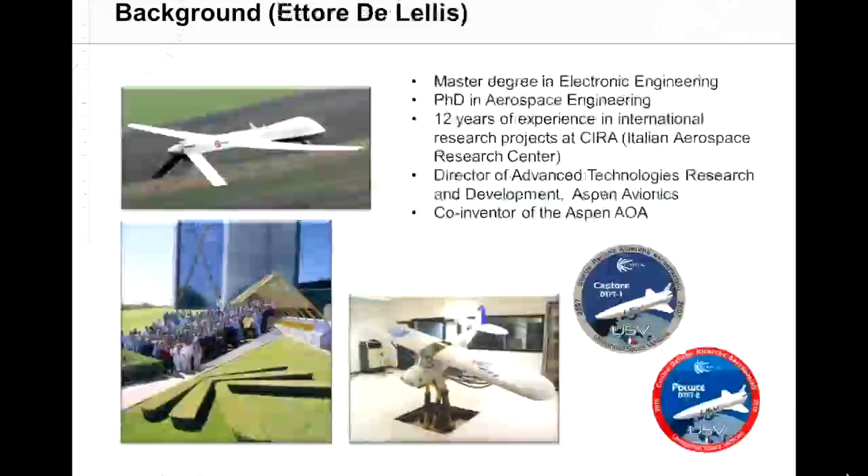I'm very lucky to have with me this evening Ettore De Lellis as a co-presenter. Ettore's background in aerospace engineering is impressive, and we're very lucky to have an engineer of his caliber here at Aspen. As you can see, he has a master's degree in electronic engineering, a PhD in aerospace engineering, over 12 years experience in international research projects at CIRA, the Italian Aerospace Research Center, which is equivalent to our NASA. He's currently Director of Advanced Technologies Research and Development here at Aspen Avionics, and as Jeff mentioned, he's the co-inventor of the Aspen AOA.

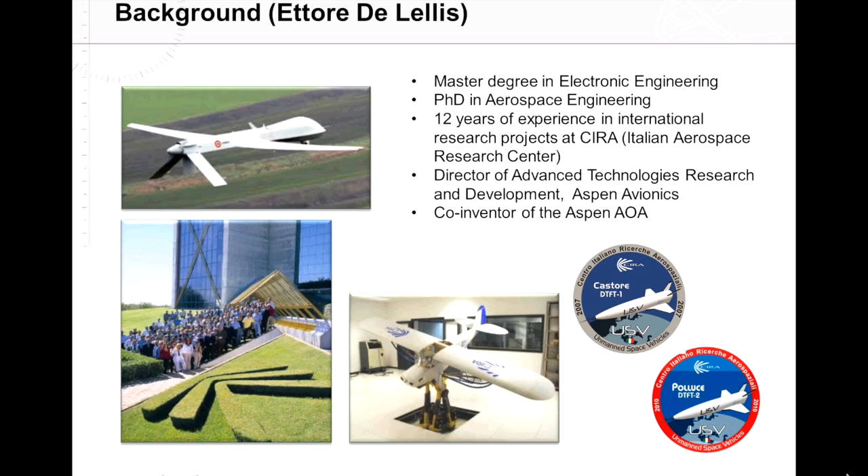So what's the issue? In case you haven't heard, the NTSB has made prevention of loss of control in flight type accidents its top priority. The prevention plan is based on: one, education; two, flight currency; three, pilot self-assessment; and four, increasing situational awareness in the cockpit.

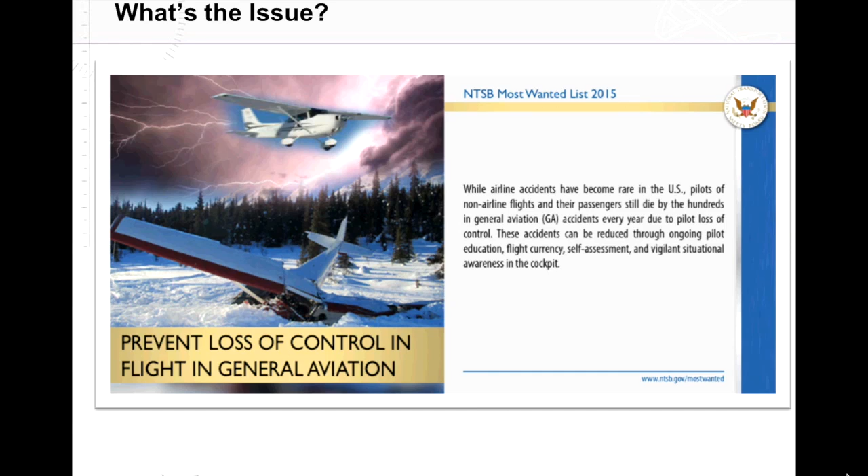Angle of attack indicators, or AOA, have been used in the military and commercial aircraft for years and are a much better indicator of stall awareness than airspeed. Therefore, the NTSB and FAA are promoting AOA indicators for GA pilots in an attempt to reduce these types of accidents.

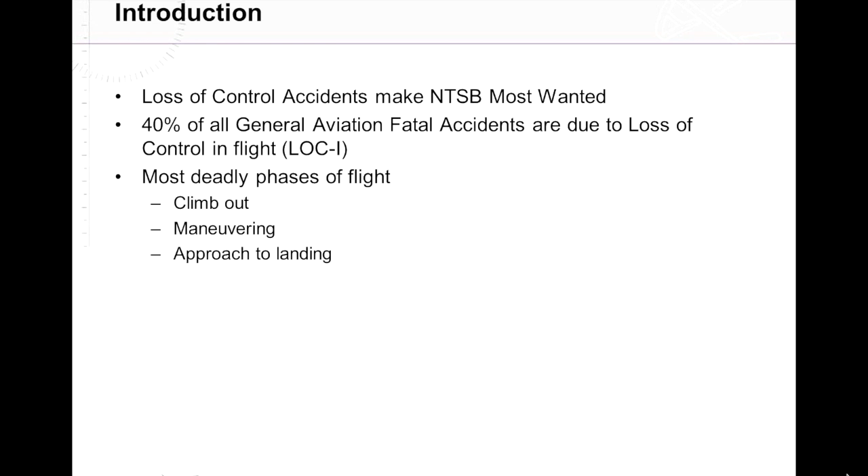The NTSB looked at the most deadly phases of flight, which are climb out, maneuvering, and approach to landing. Well, how many of you do one of these three things when you fly? This is what we do every time we fly.

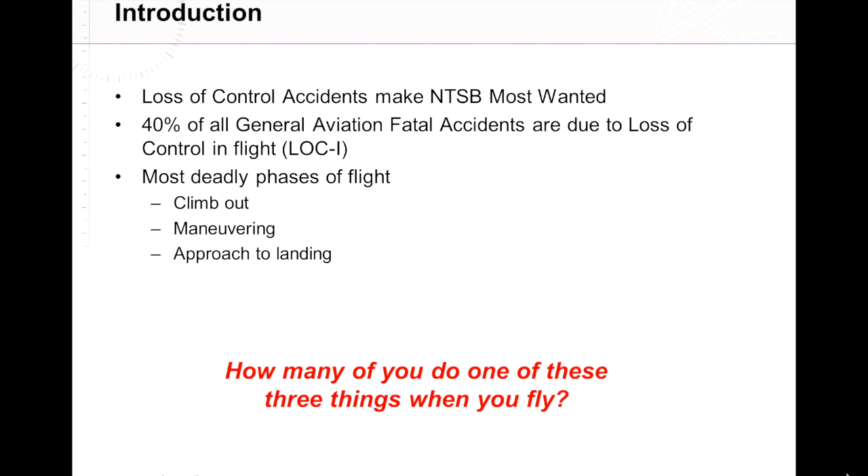Low altitude operations maybe include things such as flat hatting, or a new term I learned this past summer from a hunter, called moose stalls, where hunters are flying low to the ground and they see game they want to shoot later, and they wrap up and end up flying the aircraft into the ground.

Running out of fuel, unintended flight into IMC by a VFR pilot, are other types of accidents that are out there. CFIT - controlled flight into terrain.

If you think back on this one, it was pretty high up there 15 to 20 years ago. This number was reduced through advanced technologies like GPS, terrain avoidance systems, as well as synthetic or enhanced vision.

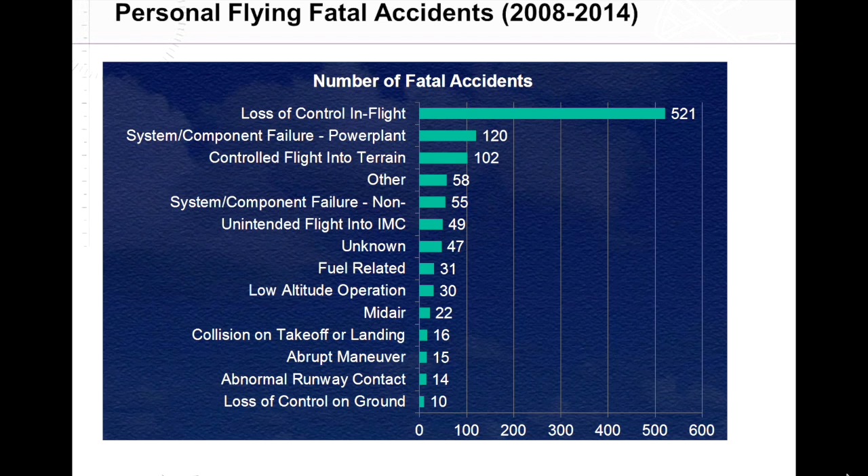Now on to commercial accident stats. But before I show you this chart, I want to go back two slides. Looking at these types of accidents for GA personal flying, what do you think is the top one for commercial flying? Would it be fuel, component failure, CFIT?

When we look at the chart, if you thought loss of control in flight, you'd be correct. So even well-trained professional pilots fall victim to this preventable type of accident.

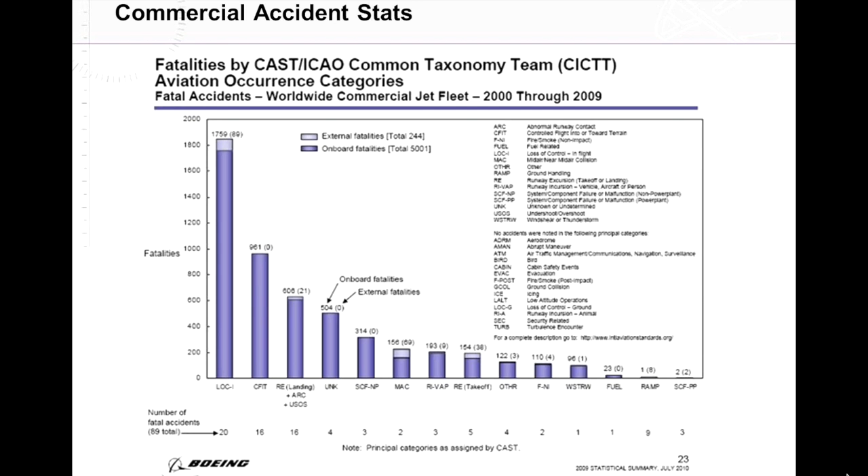Combining takeoff and initial climb, this is where we typically see the power-on type stalls.

We'll skip over crosswind and downwind, and look at base, approach, and finals. These are typically caused by not flying a stabilized approach, correcting only when pitch and power are needed, or overshooting final due to a crosswind. We have a really good video at the end of the presentation to show you how AOA can prevent this type of accident.

Lastly, there is the missed approach IFR or go-around VFR type of maneuver. In these cases, the pilot has made a good decision to discontinue landing, but somewhere in the hustle to change configuration ends up settling back into the ground or stalling the aircraft. This is where an AOA indicator, especially one with dual indicators like the Aspen, really shines.

So there you are coming into land on speed with the AOA indicator parked right where you want it, nice and stabilized. Then just short of the numbers, you notice another plane pulling out on the runway. You immediately initiate a go-around and want to get away from the deck quickly and reach to raise your flaps. You remember from training to look at the flaps-up indicator prior to doing so.

You notice the flaps-up indicator is up in the stall area, so you reduce AOA slightly to get that needle towards the green band prior to raising flaps. Becoming another loss of control in flight statistic has just been averted.

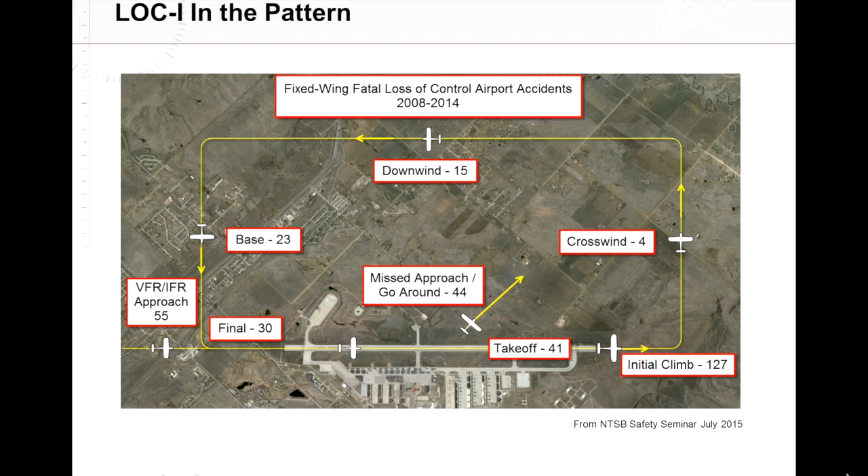So let's talk now about AOA principles. The angle of attack is defined as the difference between the airfoil chord line and the relative wind direction, or flight path in the air. The chord line is an imaginary line drawn from the leading edge to the trailing edge of an airfoil. The relative wind is the direction of the airflow impacting on the wing.

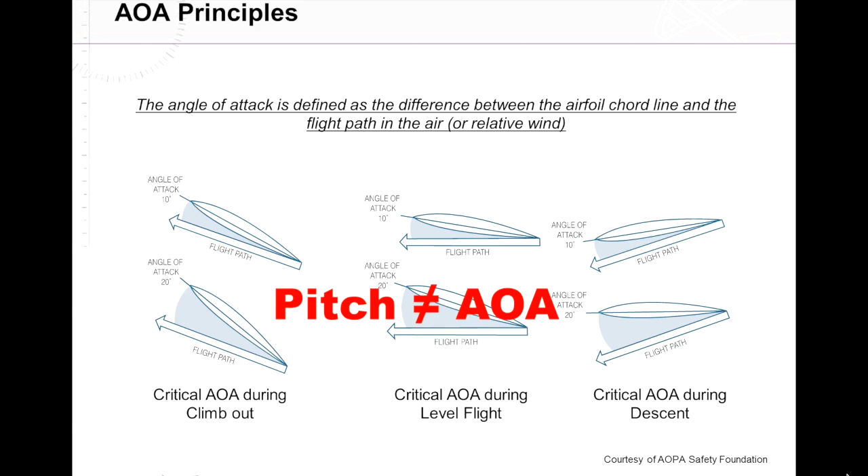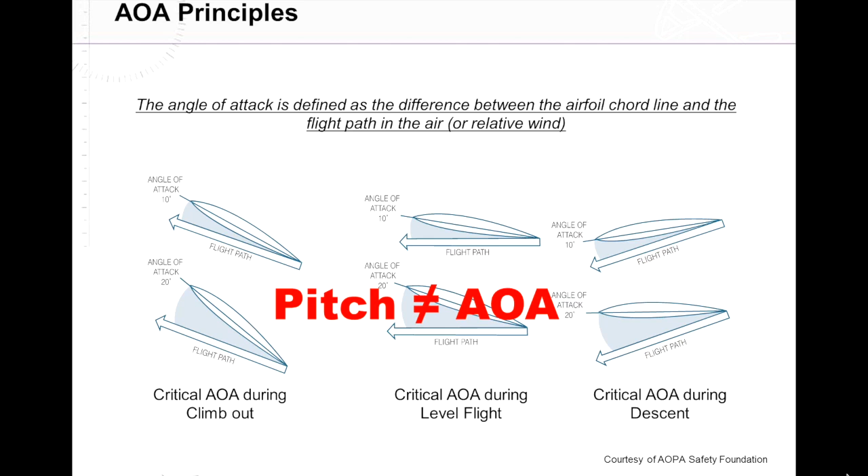In this figure, we want to stress how the AOA is completely different from the flight path angle, obviously, but also from the pitch angle. For instance, we could have the same AOA of 10 degrees in three completely different situations, like climbing out, level flight, or descending.

Stall always occurs at critical AOA. The critical angle of attack is the point at which, as the angle of attack increases, air will no longer flow smoothly over the wing. When this happens, the airflow separates from the surface of the wing, resulting in a drop of the coefficient of lift, and therefore a drop of lift, and finally a stall. Stall always occurs at the same critical AOA, regardless of gross weight, angle of bank, load factor, attitude, CG, and above all, airspeed.

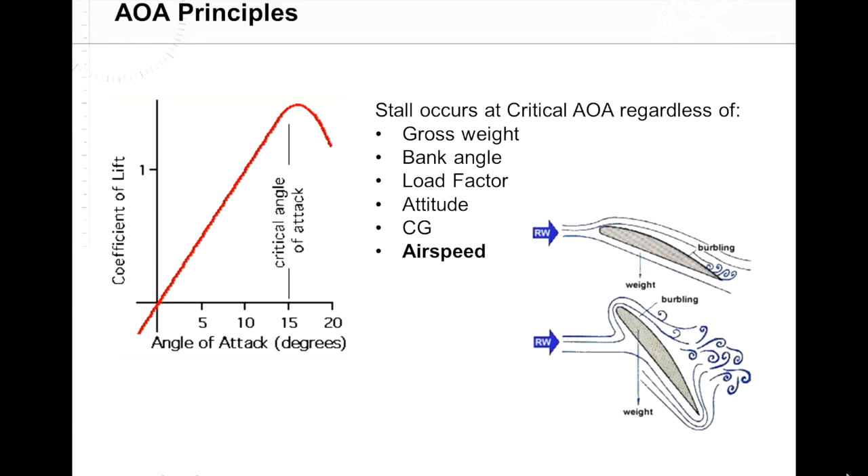Among others, one of the most important variables affecting stall speed is the angle of bank. This is because for angles of bank different than zero, only a percentage of the lift is available for supporting the airplane's weight. The point to be stressed here is that stall speed changes with the angle of bank, while the critical AOA doesn't.

Now, James maybe wants to outline something on this table. Okay, so let me jump in here for a minute.

So what we have here on the right side of the display is a stall speed chart from a Cirrus SR-22. When you fly a normal base-to-final turn in the SR-22, you transition from 90 knots indicated to 80 knots indicated in the turn with the flaps already at 100%. If you look at the most AFT CG 100% flaps down section in the lower right, you'll notice that if you're at 80 knots, as long as you're below 30 degrees angle of bank, you have plenty of stall margin. But when you increase to 45 degrees angle of bank in an effort to save an overshoot, your stall margin quickly gets eaten up.

And if you go even further past 45 towards 60 degrees, basically, if you're at 80 knots, you're going to stall the aircraft. AOA systems such as the Aspen will provide you advanced warning of an impending stall once you learn to incorporate it as part of your normal scan, IFR or VFR, and understand its meaning.

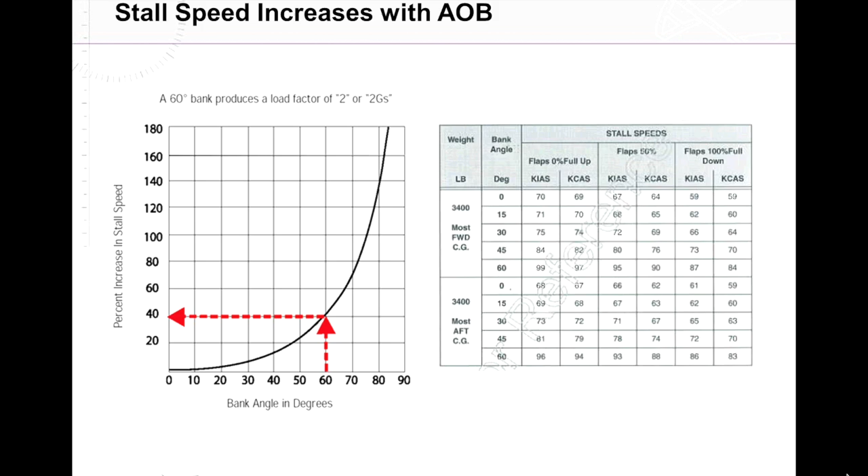So, which are the AOA device styles? There are three main styles of angle of attack devices.

The first is the vane style, mainly used in military and commercial aircraft. The vane rotates to align with the relative wind, and the position of the vane itself is a direct measure of the AOA.

Another style is the differential pressure one. In this case, the AOA is calculated from two pressures measured by a dedicated probe. Finally, there is the software-derived style, where the AOA is calculated using measures typically already available in a display, not from dedicated sensors to be installed. The Aspen AOA is a software-derived device, and we are honored to have received the Flying Magazine Editor's Choice Award for this product.

Well, let me jump in here real quick again, Ettore. I spent most of last spring and summer flying with FAA test pilots and a lot of press and customer demos in my Cirrus. I noticed that when walking up to the plane, everyone was looking underneath the wings and then back at me. I had to chuckle and tell them there are no hidden AOA probes under the wing. Their common question was, how can you do this with just software? My response: it's rocket science. And since we developed this with Chiron, this is a true statement.

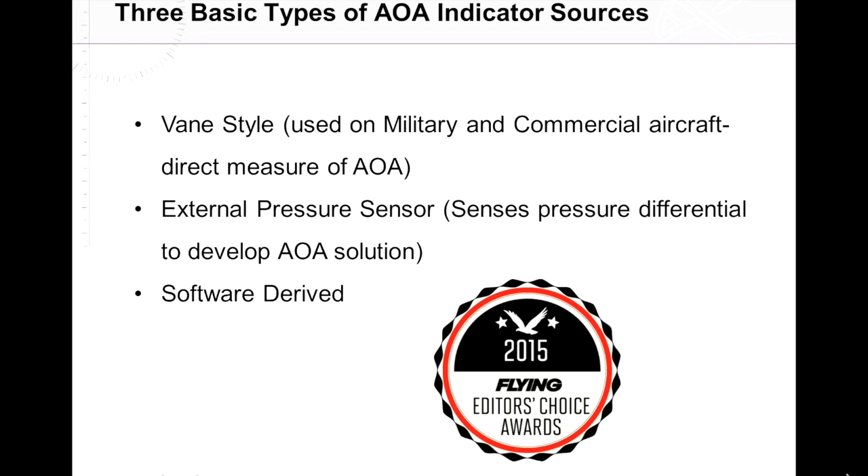Okay, right, thank you, and I will say something about that in the next slide. The Aspen AOA uses measures already available in Aspen displays, as we said, like accelerations, gyro rates, GPS ground speed and track angle, true airspeed, indicated airspeed, and climb rate.

So as you said, very often we hear the question, how can it work? Well, we developed in collaboration with Chiron a proprietary algorithm, and in simple words, it is an aerodynamic model of the aircraft that we feed with different information. Firstly, the measures I have just mentioned, but also information gathered during the calibration flight, when we basically learn about the lift profile of the specific airplane.

Finally, the parameters collected from the POH of the specific aircraft, for instance, the stall speeds. By means of this model, we can calculate the angle of attack, but also we can calculate the side slip angle and the wind components. For this reason, our AOA is not affected by high angles of bank or by high side slip angle conditions, like many other devices based on direct sensors.

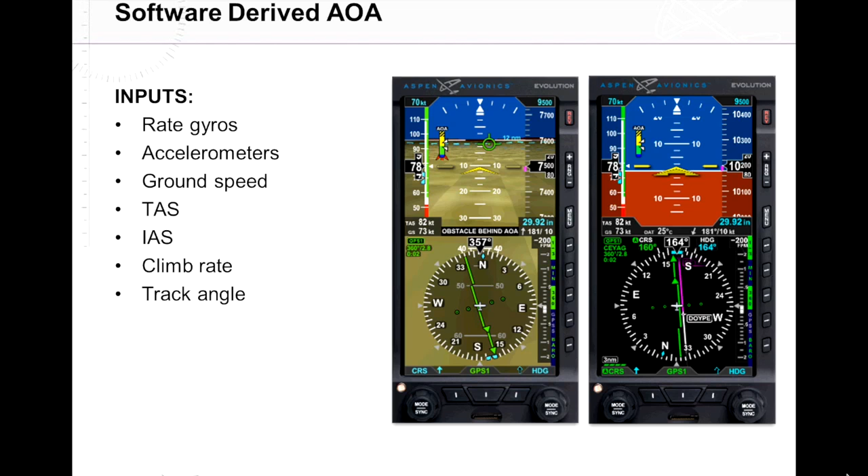Now James will illustrate some AOA in action situations.

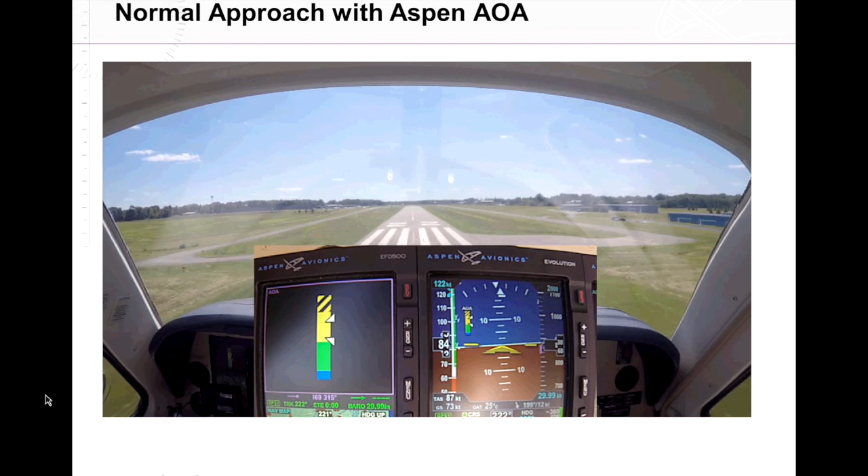Since he has full flaps configuration, he'll be scanning the lower indicator while primarily looking at his book airspeed. As you can see, that needle is bouncing around the green-yellow transition as he's coming into land, flying his book airspeed. It's important to note that you need to fly your book airspeeds and use AOA as supplemental information. For my military folks out there, this is not the same as flying an AOA approach to a carrier, where you reference only the AOA and external visual cues from the ship to conduct an AOA landing.

It's important that GA pilots fly the book airspeeds and reference the AOA indicator for stall margin. Now remember back to the stall speed chart I showed you: stall speed increases with angle of bank.

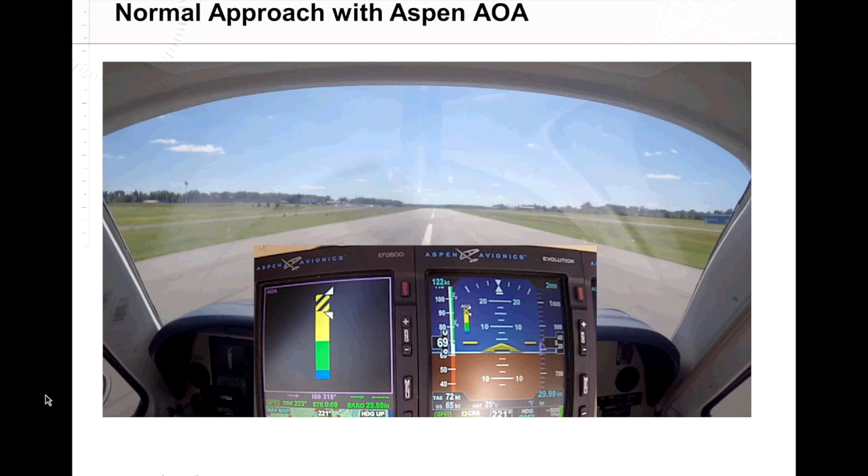Now Phil's going to show us what a short field approach looks like. He just did a normal approach in that one, and this one's a short field approach. He's going to be at a little bit slower airspeed.

And he's in the landing configuration, so once again we're referencing the bottom indicator, the flaps down indicator. Note while he's flying that the flaps down indicator is modulating on the green and yellow transition. He's flying his airspeed, but cross-referencing the AOA indicator to maintain stall awareness all the way down.

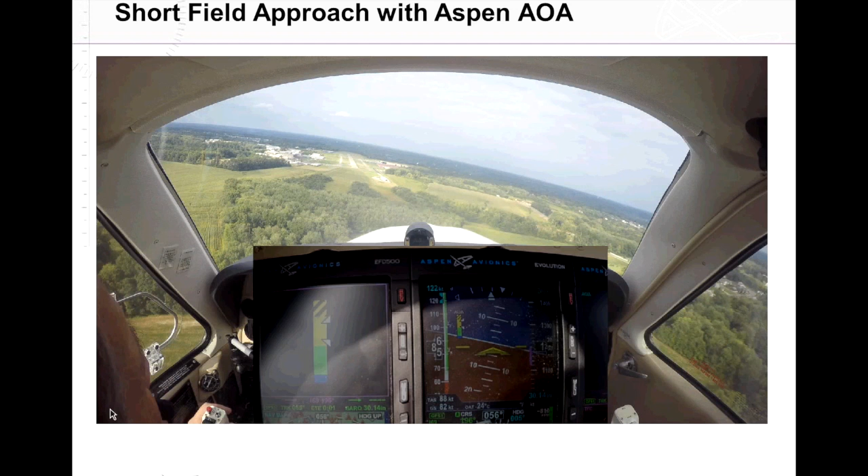For a multi-tube customer, you'd probably have only one AOA indication up, maybe on your MFD. But if you're a single-tube customer, and that was one of our primary concerns, we want to also offer an AOA indication for our PFD-only customers.

Here he comes in. He was able to maintain it pretty well right there at the green-yellow transition.

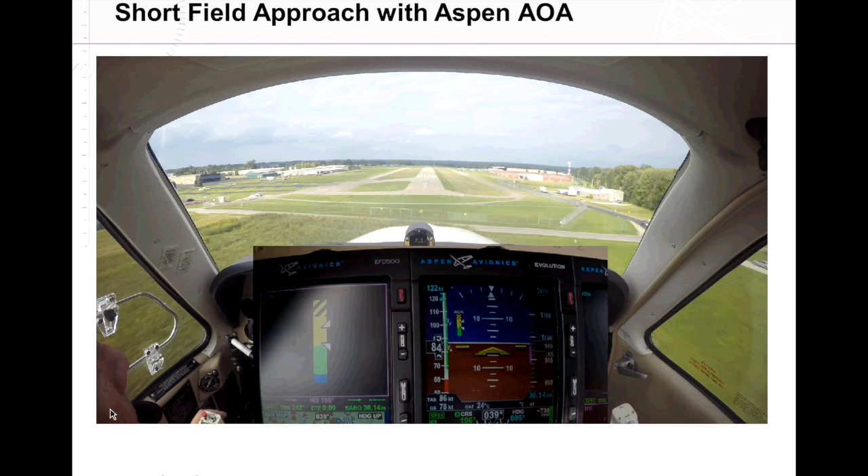In this video, Phil has a bit more altitude. He's going to demonstrate how the AOA works during a landing configuration stall. Note that once again, we're looking at the lower flaps down indicator during this maneuver.

As the aircraft slows down, the lower indicator slowly moves up the green band, past the green to yellow transition. Now here it's important to note, if you see that indicator in the yellow band, this is where you should already know something's going on.

You need to reduce the angle of attack. It's getting slower and slower. The stall horn goes off right about there. And right there you can tell the aircraft breaks, and that's a stall.

So remember, the key takeaway on that video is when you see that flaps down indicator going up the yellow band, reduce your angle of attack and recover early.

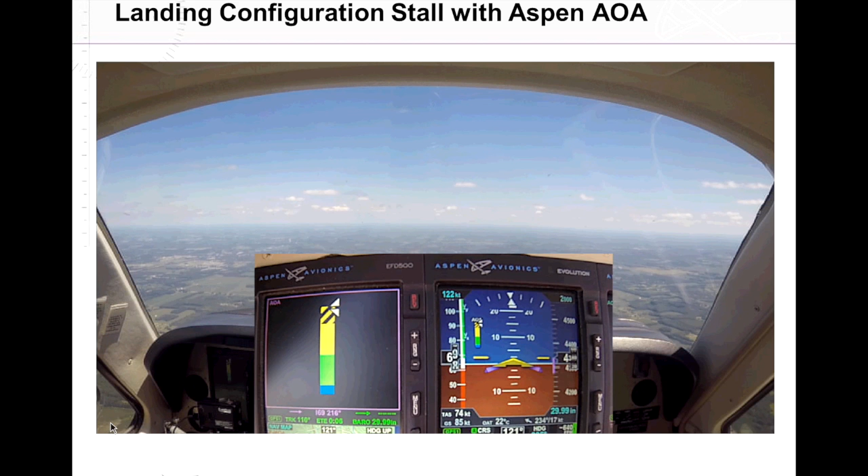Now on to a takeoff and VY climb in Phil's Bonanza. Since he's in clean configuration, we'll now be looking at the flaps up, or the upper indicator.

A good thing to mention here is the PFD is currently in AOA auto mode. Right now the aircraft's on the deck, so the system does not see the need to have AOA displayed. But once airspeed starts coming alive and the aircraft starts rolling down the runway, you'll note that the AOA indication automatically pops up without any pilot interaction on the PFD.

Also note on the MFD, while the AOA is not needed, the needles aren't there. The AOA band is still there, but the needles aren't there. So once the aircraft starts rolling down the runway, you'll see the needles appear from the top and start working their way down.

It's also important to note here that AOA cannot be used to decide when to rotate. You can see as the needles aren't in view at first, and then there they go—they pop up and start scrolling down the band.

As the airspeed increases, once you're out of ground effect and start climbing, you can see as he's working towards VY, this would be an excellent indicator that would prevent those power-on stalls we talked about earlier. So he's slowly increasing his speed.

I believe VY in his aircraft is right around 97 knots. And once again, we're looking at the upper indicator, and lo and behold, look—that upper band is parked right there at the green to yellow transition, giving him about roughly a 30% stall margin.

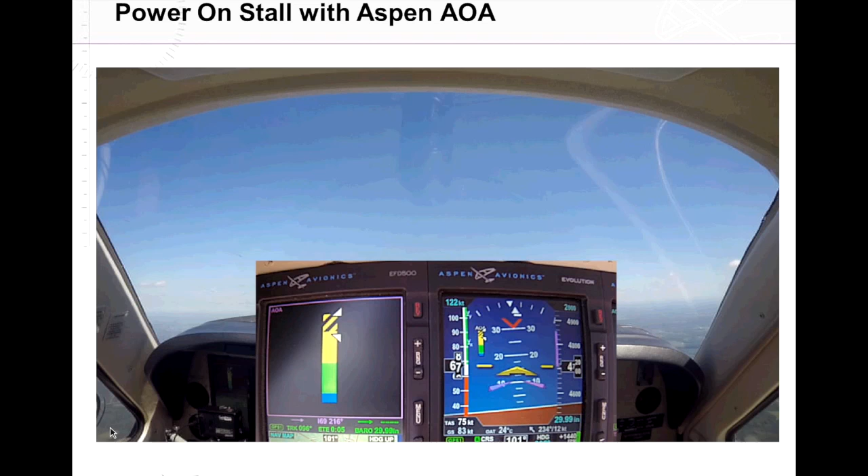Here he's going through the transition. Note also, if you look at the PFD really quick, you'd see the red chevron of the attitude indicator. That's another great tool Aspen offers to let you know you're at excessive pitch angle and need to push the nose down. There it is up in the crosshatch area. The stall horn has already gone off and the aircraft just broke right there. So once again, if you note the needles moving up into the yellow band, you need to reduce your angle of attack back into the green band to maintain a healthy stall margin.

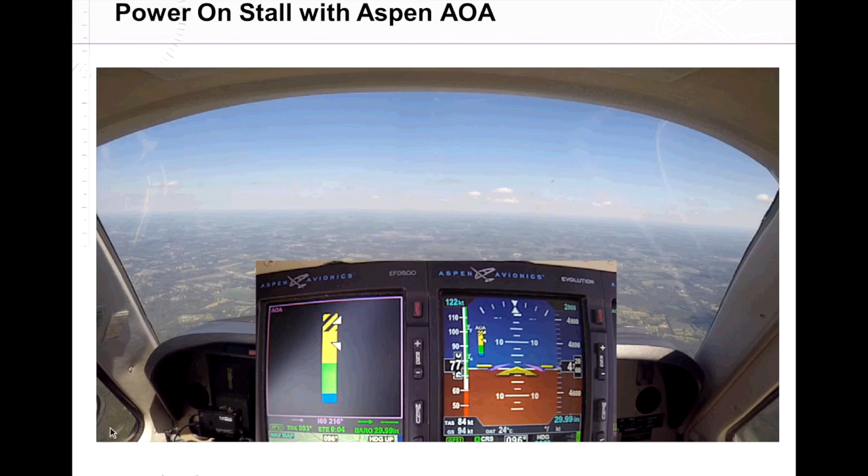Now these last two slides are very important. This first one shows what a normal base to final turn should look like. Note that throughout this base to final turn, Phil does not exceed 20 degrees angle of bank - I think the most you'll see during this turn is 20 degrees. He's in landing configuration, so we're looking at the bottom needle. And that bottom needle, as long as he's flying his book airspeeds, is going to stay in that green area.

There, rolling out on final, and with plenty of stall margin - very well executed.

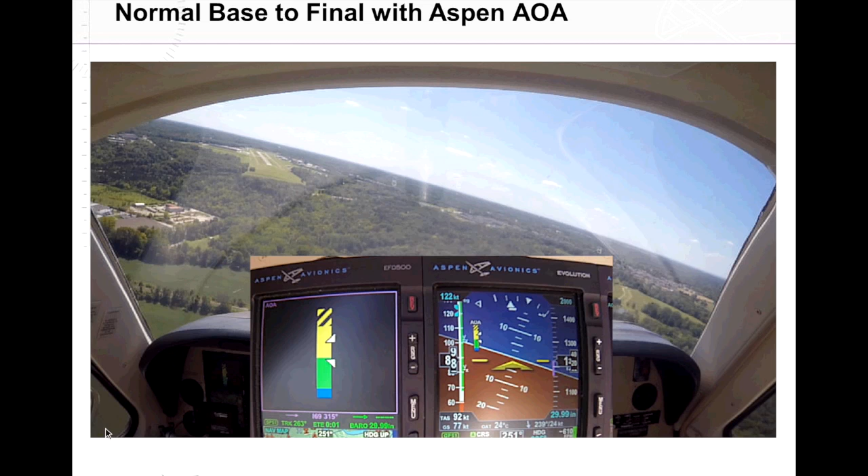So here's the base to final, the infamous base to final overshoot, and how to read the Aspen AOA. What Phil's going to show you ever so briefly is what the AOA will indicate if you overshoot final and then try to salvage it. Since he's in a normal pattern this time, he won't roll much past 30 degrees angle of bank, but it's more than enough to show you that if you keep AOA as part of your scan, even if your airspeed seems okay, you'll be able to detect quickly that you're running out of stall margin and need to do something to correct it.

So here he is. Once again, he's in landing configuration already, so we're looking at the lower needle. The lower needle's down there in the green band. He's right now just about 25 to 30 degrees angle of bank. Everything's still looking really good.

He rolls off for a second, getting ready to turn base to final, and realizes he just overshot. He wants to impress his friends and family and not do a go-around, so he's going to try to salvage this. Now watch him roll to 20 - there's 30 degrees angle of bank, and look at where the lower needle already is. It already shows him at this point that he's lost his stall margin and needs to reduce his angle of attack to get it back into the green. So as long as you learn to incorporate this into your scan, it's going to be a very effective tool.